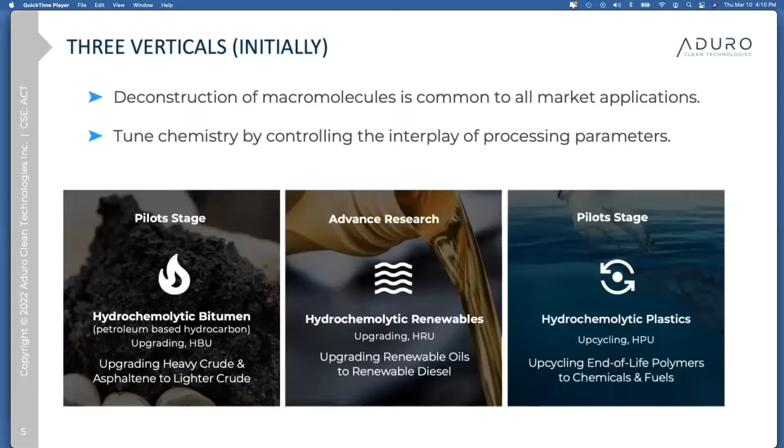Over the years, we've been sustained by government grants. We did a lot of work over the last 10 years with government grants, and we're definitely looking to expand this work, both internally in Canada and probably outside.

We have done a lot of work with academia. We spent most of our time at the University of Western Ontario before we opened the lab. And we see definitely expansion right now that will go forward into Europe, probably engaging with a research institute that's really interested in what we've been doing. There'll be a press release associated with that in due time.

We've been working recently as we are moving from the lab to a commercial space. We've been working with an engineering company, XSG from Alberta, but we already see possible engagement in the Netherlands. That associates more on the plastic side, but will expand our capabilities in terms of the engineering side.

Over the years, we've done several commercial engagements. Some of them we cannot disclose. We're in active engagement with a major oil company in Alberta, but it's under NDA and we cannot disclose it. We engaged Greenfield Global at some point during 2015, 2016, and investigated basically the work on renewables.

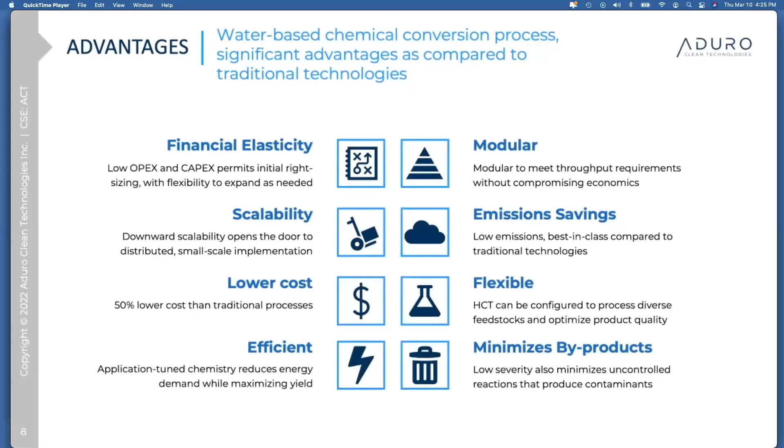I talked before about emissions, and I'll just repeat that it's not just that we have lower emissions - we're also saving a lot of the negative impact associated with those activities, like transporting material from A to B, sorting it, and processing it. A lot of those impacts go away, a lot of those costs go away, with our process basically.

The first one is thermolysis. This is where you inject high energy, heat basically, in order to break what we call bond rupturing of the molecules - the plastic - to change it from its current state into some kind of oil or something worth a little more. You have to shorten the molecules, and injecting heat is basically breaking down the molecules. But if you do that, you have to deal with other issues such as extensive pre- or post-treatment.

Solvolysis is another concept - it's easy to give the example of a car manufacturer with a unified type of waste plastic, where the waste responds very well to some kind of solvent. So they mix it with that solvent, regenerate it, extract it back, and can reuse it again. It's more of a niche solution.

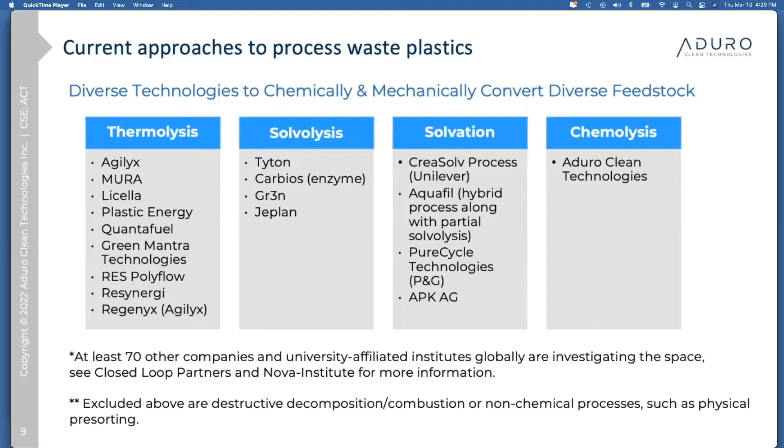That's it for the background. In the last few minutes, I thank you for listening to us. We gave you some background about who we are, what we're doing, how the technology operates, and the benefits embedded in it. In the coming slides, we translated this into a commercial path where we will establish a pilot and move forward with a 5-year plan that we're eager to share with you, showing why it's really the right time to invest in the company at this point.

Then we produce about 6% gas and 4% byproduct. Of that 6% gas, 60% are gases we can use to regenerate the system, which speaks to the level of energy required. The system requires energy on one hand, so we need to compensate and add some, but it's really efficient - a very, very efficient process. On the other hand, 40% of that 6% is just CO2, so we have about 2.4% of the total mass coming out as CO2, but this is a very low number compared to anything out there currently.

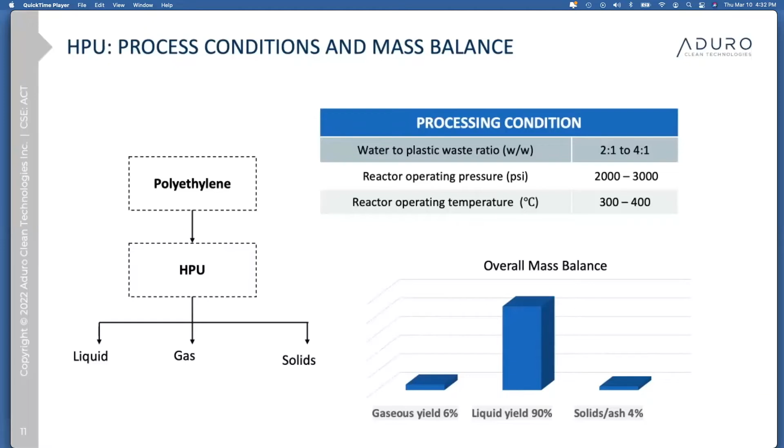There's a process that takes ethylene and creates PE plastic, polyethylene, out of it, and then that moves into some kind of product. Those products end up as post-consumer goods in shops - you buy them, drop them down, and they end up in the waste. We come down and collect them, and process them. When we process them, we break the component back to an oil that could be used again to create polyethylene. So it's a full circularity mode in our case, and bear in mind, we can do that again with other types of mixed plastic, such as polypropylene or polystyrene.

We're just now going to do some work on PVC, and so our goal is to increase our capabilities.

It gives you a sense, if we have a process that can operate at such a level, in small scale, at low energy, and prevent a lot of material from entering the waste stream, what does it mean? It means that, for example, we can approach a customer who would otherwise dump this whole thing into a landfill or to some kind of plastic conversion or collector. For such a customer, this would be a cost center. As with one of our possible engagements, we're offering a customer with a complex feedstock, such as food packaging, a concept where we turn a cost center into a profit center, where the customer could return that material back to his supplier and gain credit for it.

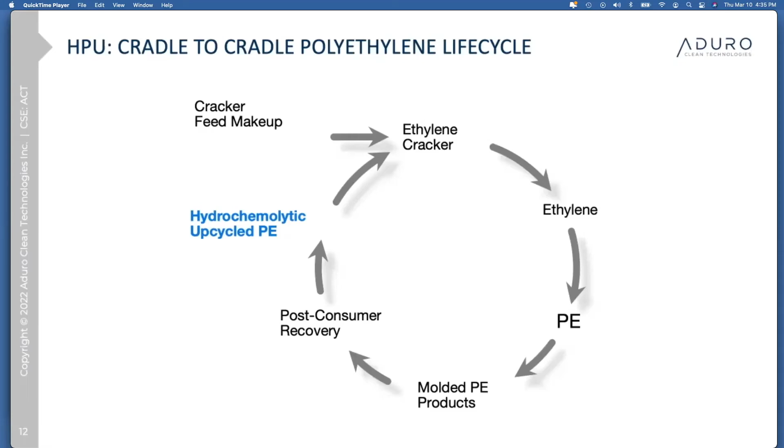So if this is a sector like food packaging, we can multiply that solution across food packaging. If we're working in agricultural, we can work there and multiply our operation in agricultural. That means we're preventing that type of waste from moving into the landfill, and we keep it without transportation, at the same place, turning it from a cost center into a profit center.

As we move forward, we develop our commercial concept. We talked about the technology being scalable at a small scale and being able to scale up. So we envision small units with really good returns, and in the next few years we'll develop a process able to capture a wide range of mixtures of plastics. It will start with a small unit, only 25 tons per day. The idea is that if you have projects later that are bigger than that, you can just expand it. We call them train reactors, and you just add more trains based on the project.

So what you see in this scenario are two cases: one of 25 tons per day with its performance, but also a case of maybe 9 reactors, 200 tons per day. The vision is that after about 3 years, between year 2 and year 3, we start to fund the growth of the company and do work on projects rather than on the technology.

So our plan is to commission a 25 tons per day reactor and expand our processing capacity by adding additional reactor trains. This slide represents 8,500 tons per year of a commercial unit, and you can see the gain from doing it, the gross margin. We also give an example of 200 tons per day, but I'd like to say this is not the limit. We will approach different opportunities ranging anywhere from 20 tons to 300, 400 tons.

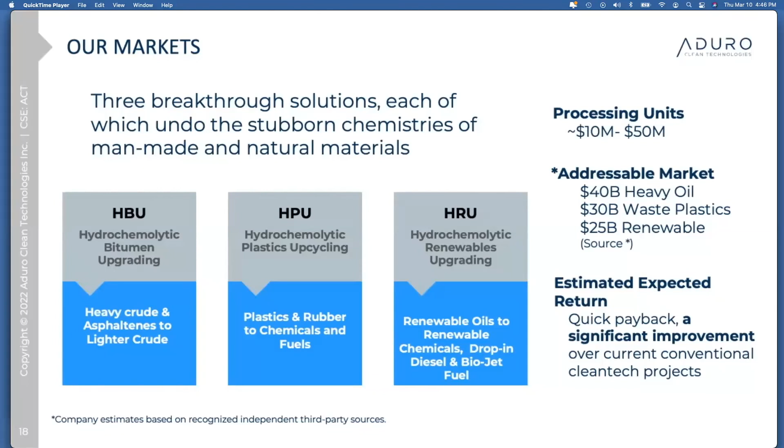Basically, at the beginning of our journey, we put 66% of our ownership on the shelf, and we conditioned the return of those shares upon success. So the first time we performed third-party validation, we brought about 33% of those shares back home, and we anticipate that next year, based on the expected commercial engagement we have, we will materialize on those special warrants as well.

Thank you very much for having us, and we spent the time showing you what this technology is, what its capabilities are, and where we are. I hope you get from this that we really think of the technology as a high growth investment opportunity, embedded in the technology benefits and capabilities, a lot of benefits that cater to our market and enable us to materialize on it.

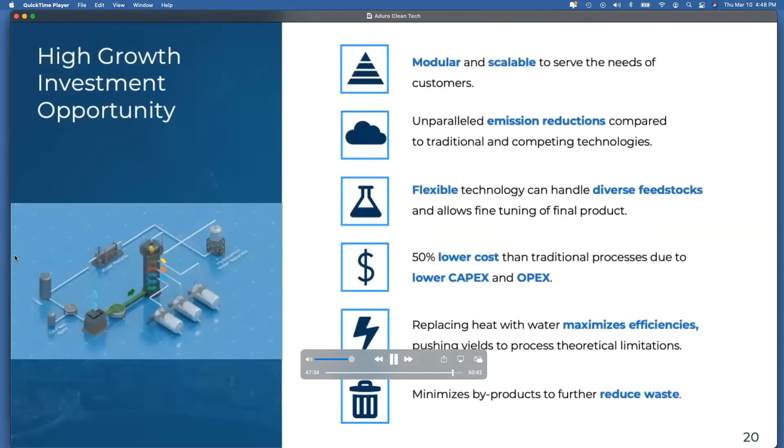Basically, it's operating in a low energy mode, as has been discussed, and I can refer you to some presentations we did recently at different conferences where our technical team speaks about why we can operate in a low energy mode. Actually quite fascinating presentations.

If we're operating in a low energy mode and low capital cost, but we have very high yield, of course we have high efficiencies. We spent time to explain and show you a case study of 90% yield. This is really unheard of in this industry, and through our business model we were even more conservative and considered 80% of this yield, just to be on the safe side.

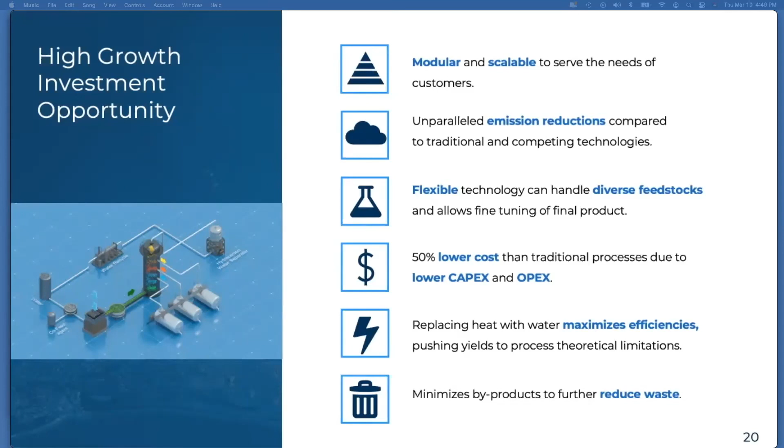It has very little byproduct, and so we think those opportunities give the company a lot of potential to materialize on projects. So I hope with our presentation, I'd just like to take you to the last slide.

Why really invest with us now? What's the opportunity right now? As I mentioned, this is a unique patented technology that has been independently validated. We're looking at an output bigger than 80% yield for our operation and the feedstock we'll be operating with, really a nice margin, nearing 50%. We have key engagements for our pilots, both in Ontario and in the Netherlands, and they are different.

One of them is dealing with a single type of plastic, the other one is a mixture of plastics. We have an ongoing discussion that we gained in the last 9 months with potential customers across 7 countries, and we envision that if we build those hubs in the future, we will have the same deal flow in each territory, so multiple customers.

We look at the ramp up of revenue occurring, annual revenue occurring, bigger than $90 million, with a nice healthy margin of 50% by year 5.

And also as a management, as I mentioned before, management is fully engaged and aligned with the shareholder goals to increase value with 50% ownership, and eager to and hungry to present itself and demonstrate its capabilities.